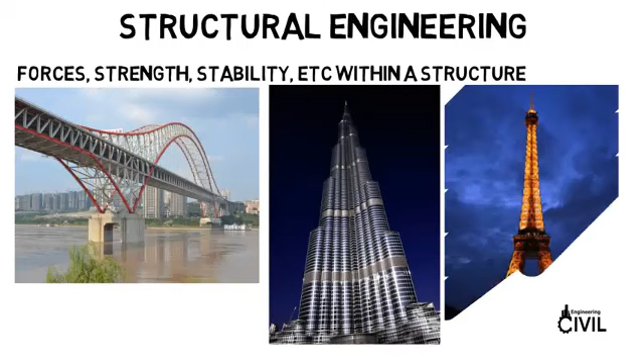First, structural engineering is about calculating and understanding the forces, strength, stability, and so on within a structure. It could be a bridge, a skyscraper, a landmark, or even a spacecraft or aircraft. Remember, these structures are very heavy and need to support their own weight so that they don't collapse.

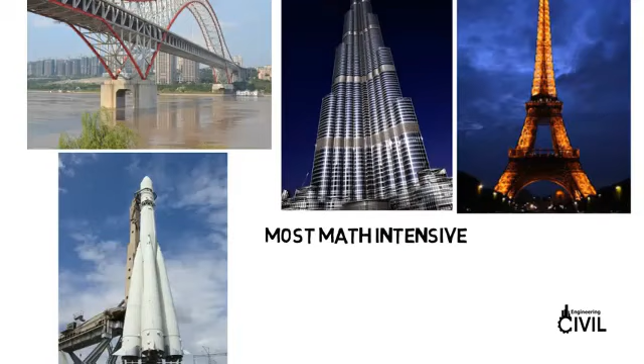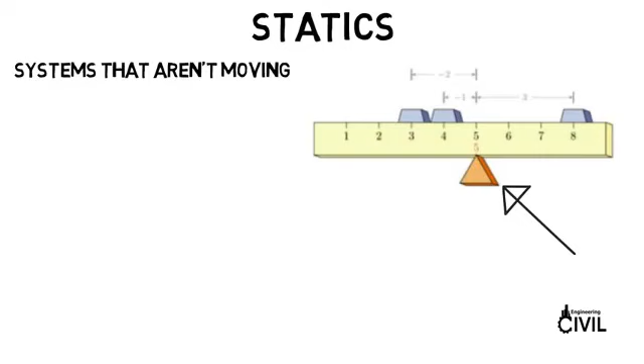This subfield is the most math intensive and has lots of physics. All civil engineers will take a class called statics, which is all about the forces and systems that are not moving. In basic physics, you may have done a statics problem, like where does this support have to be for the system to be totally balanced and therefore not moving. You summed all the forces which equaled 0 and all the torques which equaled 0. And that's the basics of statics.

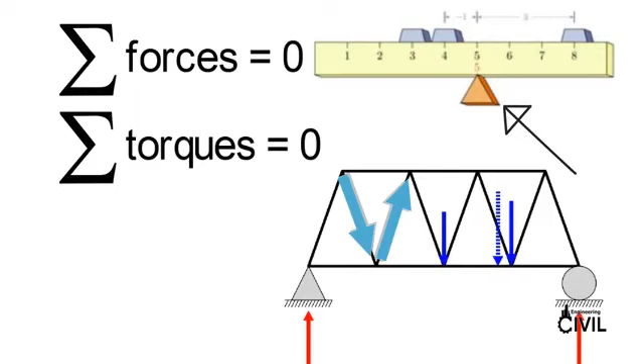So if you're looking at the forces within a bridge or truss, the same principles apply, but now there's more to it. The weight is straight down as shown in blue, all the beams exert forces on one another, but the sum of them is equal to 0, and the torque sums to 0 as well because the bridge is not moving. It's of course even more complicated than this, but if you enjoy that kind of basic physics, then you'll likely enjoy the statics and physics you see in structural engineering.

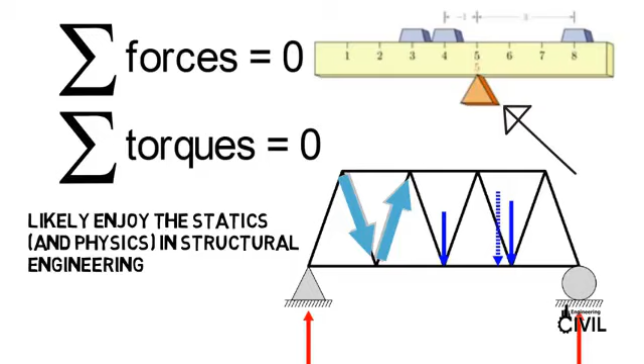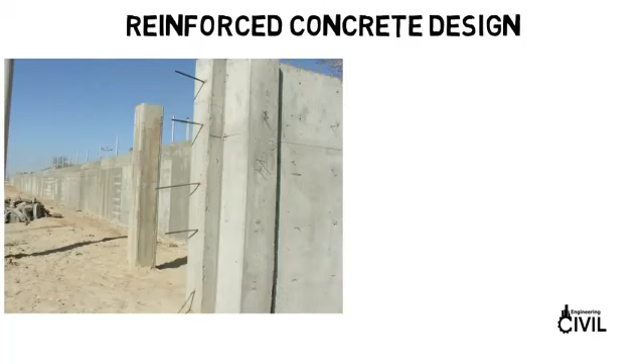So that's just a very simplified explanation, but now let's dive into some of the classes they would take. One class that would be important for structural students is a reinforced concrete class. In concrete structures, they reinforce it by putting steel beams in the concrete. We can't see those beams, but here, before construction is done, you can see them sticking out, or you can see a lot of them on these unfinished columns.

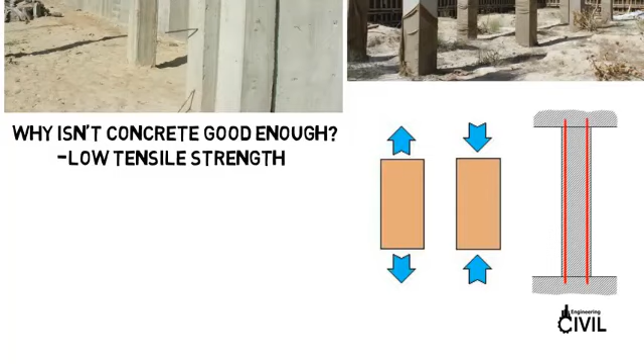So why do they do this? Why isn't concrete good enough? Well, concrete alone, once hardened, has low tensile strength, as in it does not handle being pulled very well. However, it's okay with being compressed. But to counteract that low tensile strength, they add steel beams and pour wet concrete, which hardens around them, and then those steel beams have high tensile strength to counteract those types of forces on the structure.

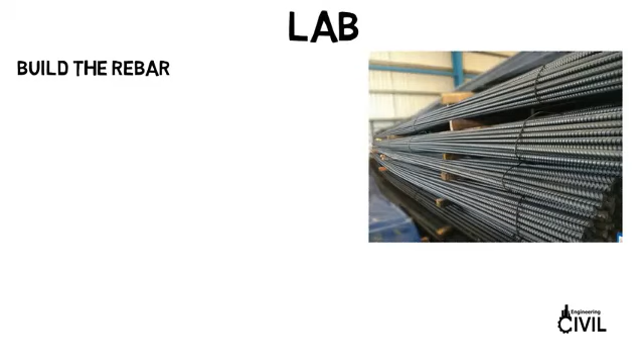So in a lab for this class, you might build the rebar, or the steel reinforcing rods, pour the wet concrete onto them, then once it dries, use a machine that holds the beam on both sides, then apply forces in the middle and keep increasing the force until the beam breaks or cracks and starts falling apart. That force being applied is sent to a computer that tells us the loading on the beam so we can collect the data and get the properties that we need.

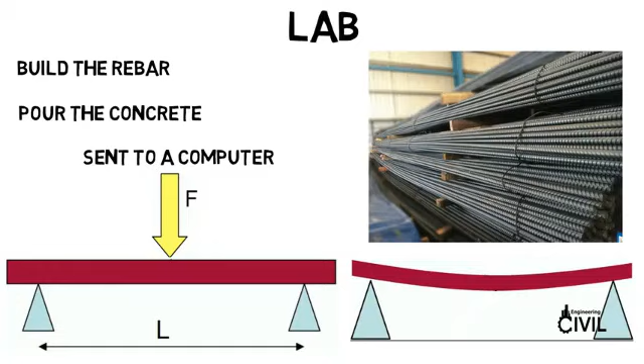You could take structural dynamics as an elective class. Dynamics is about moving systems, unlike statics. So this is one of the few classes where motion is included. Whether it's wind or an earthquake that shakes a building, you need to know how that motion will impact the structure itself and all the forces within it.

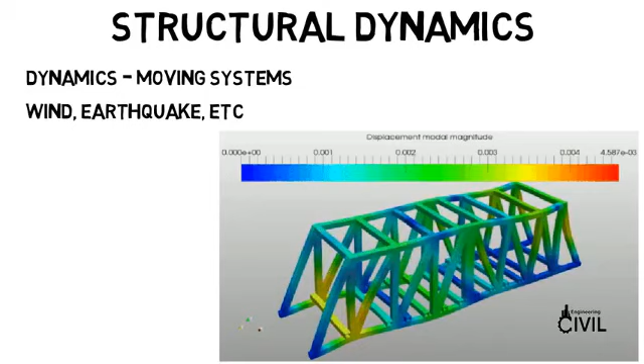I've shown this animation before, but mostly for mechanical engineers as it's a vibrating system that they could analyze, but civil engineers could get into this as well. They have to make sure their designs can stand up against any type of movement the structure may be subject to. You could take an elective class on seismic analysis, which is specifically about calculating the responses of a structure to an earthquake, or one on bridge engineering, which would be a class on highway bridges, materials used, distribution of loads, and how forces are spread throughout the structure, and so on.

Mechanics of materials, like how twisting and bending a beam or column causes it to become internally stressed. Timber structure design, which is about analyzing properties and forces within wooden structures, and much more. See how even if you choose structural engineering, you could still take many different classes from the other structure students? It's a very broad major, but hopefully you really get the idea by now.

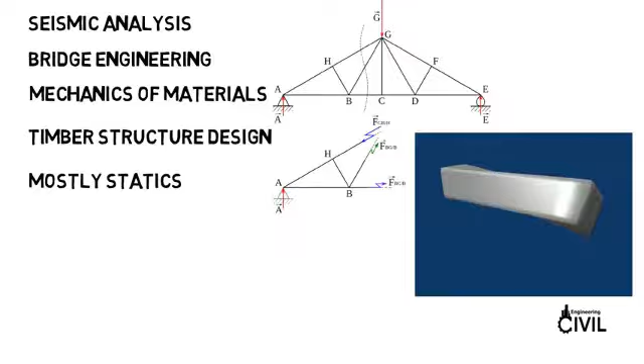Lots of physics in this discipline, but mostly statics or forces and structures without movement. In the real world, these engineers often work on the computer and use software for their designs, where that software does that advanced math to determine the forces throughout the structure, like you see here with a truss and its components. You may still have to do hand calculations, but most of the rigorous analysis you learned in school will be left to the software.

Now let's move on to geotechnical engineering, and you'll already see how different these disciplines are.

Geotechnical engineers are concerned with the behavior of earth materials like rock and soil, but the main focus is soil. This may seem odd, but you'll see how important this is.

The structural engineer can do everything right to make sure the building will stand up, but if the geotechnical engineer messes up and you put a structure on soil that can't withstand it or is uneven, the building could fall, sink into the ground, or even lean to one side, probably the most famous being the Leaning Tower of Pisa, which was a result of soil issues.

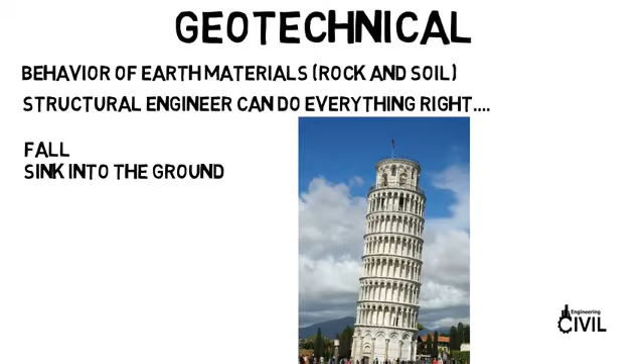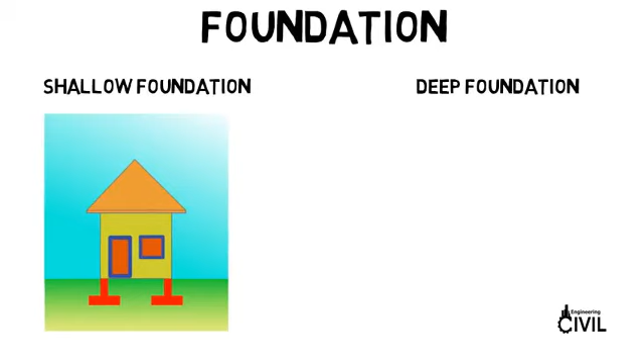Then they also have to consider the foundation of the structures that are being designed. Should they have a shallow foundation or a deep foundation? You may not realize it, but our houses and all the buildings you see have foundations that go underneath the earth to keep the structure as stable as possible by transferring the weight from the structure to the earth.

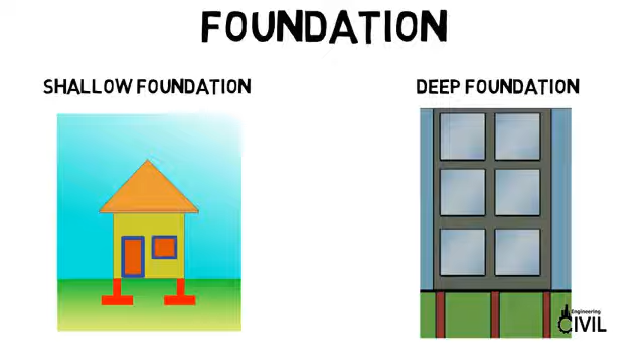But geotechnical engineers rely heavily on testing. So a lab you might see in college is to go out as a class and collect soil samples around your university and bring them to lab. You would have to classify it, like is it sand, gravel, clay, etc.

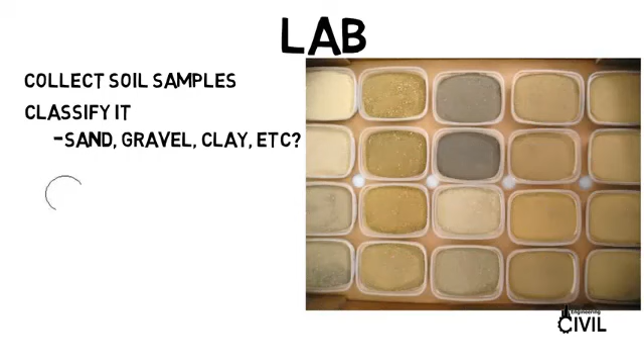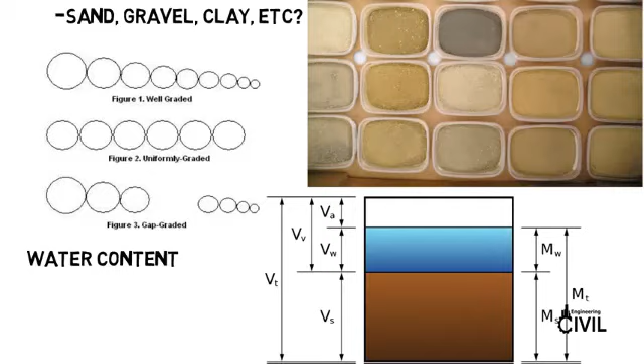There are many soil types and you may have to look at the grain size or how it reacts to water. You determine its water content by analyzing the sample, which will be comprised of solid soil, water, and air of different masses and volumes. But most importantly, you'll measure how the soil will react to mechanical loading or to different forces acting on it.

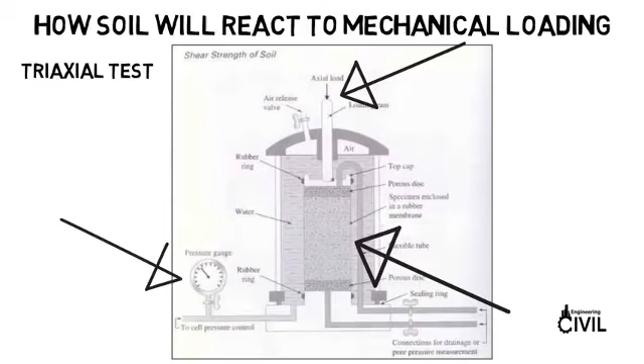So you might perform a triaxial test, for example. Too complicated to explain for this video, but essentially you put the soil in an enclosed area and apply a force or load to the top which pushes down on the soil. Then pressure sensors measure the pressure at different points to see how the soil is being affected.

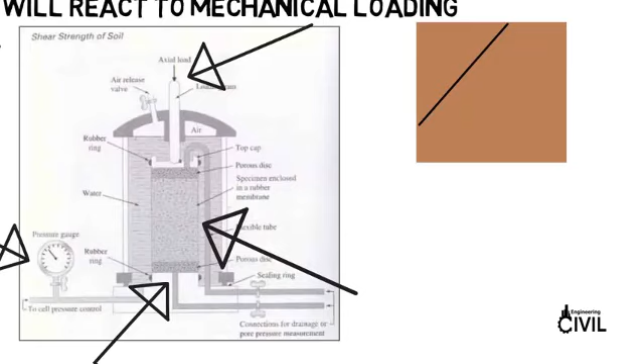If you imagine a square sample of soil and you add a force to the top, the soil can fail along some weak plane. Basically, the weight overpowers the friction holding the soil particles together, and the soil will start to slide, which is known as shear failure. Its ability to stand up to this is known as shear strength, which is one thing that the triaxial test on the left tests for.

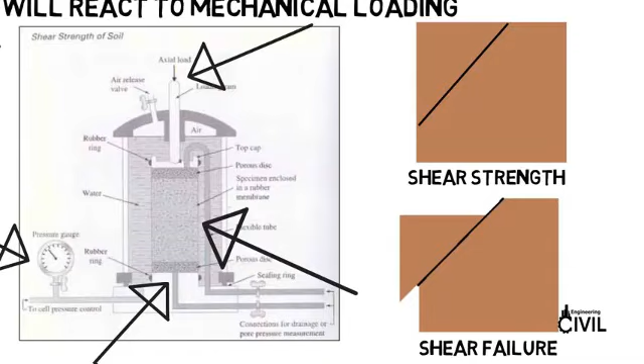And this leads us to what a career in geotechnical engineering could be like. You might be the person who goes out to the field where a structure is going to be built and collects soil samples all around the area for testing. Or you could do testing at the field.

One of the most used tests right now in this field is cone penetration testing, where a large truck goes out to the field which has all this equipment on it, and a cone is pushed into the soil, and the pressure will be monitored by a computer on the truck as it moves through the soil into the earth. Based on the pressure, you can analyze the soil mechanical properties.

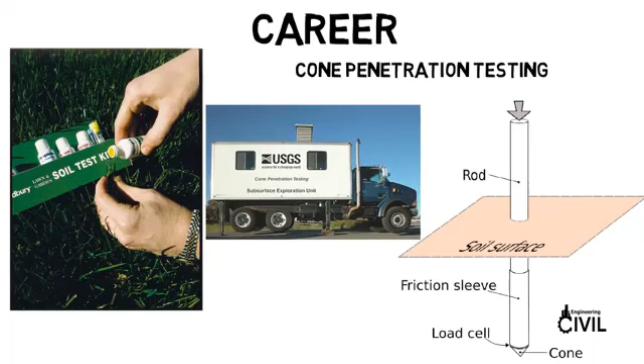Or maybe you could work in a lab where you would do the testing on the soil after it's been collected, like I showed with the triaxial test. Or maybe you could work on the computer and input the different types of soil from the various locations at the site so you can digitally lay out the area that the structure will rest on. So you could be in the field, in the lab, or on the computer.

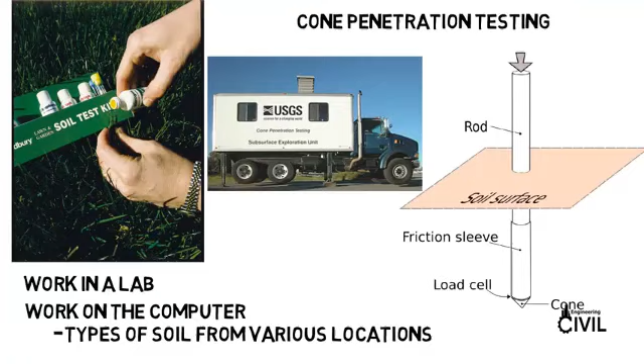Your elective classes could include geotechnical earthquake engineering, which would be like learning the dynamic behavior of soil as opposed to the structure itself. Then slope stability analysis and how to safely design structures on slopes. An example would be an embankment dam. Analysis of deep foundations, where the structure goes deep into the earth for a stronger support, like for skyscrapers. And of course, there are many more classes.

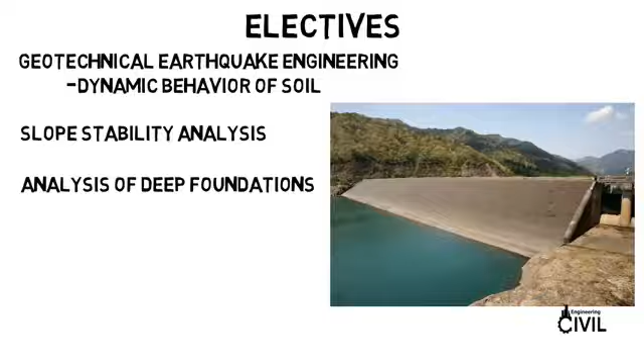Now let's move on to water resources engineering. This is about the design of systems to manage human water resources. They can work on a water treatment facility, designing dams, pipelines, channels, canals, and so on. Maybe you have to design a storm drain system in the event of a large storm. Where is all the water going to go and how will you get it to the ocean efficiently?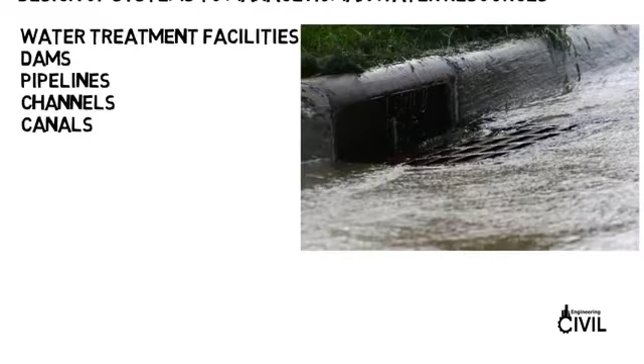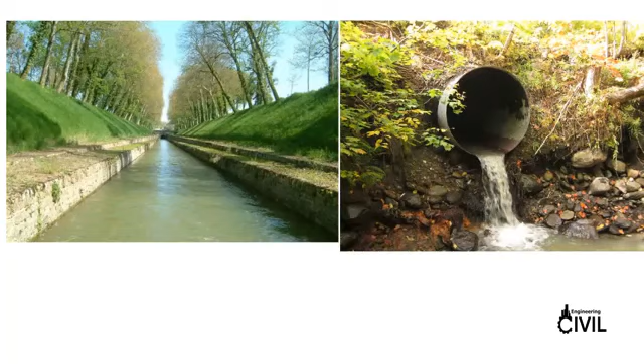Or you could design a canal, which is an artificial waterway to transport water for irrigation, or it can be used for ships and boats. Or you could design a culvert that will allow water to flow under a road or trail or some other obstruction. Elective classes you could take include coastal hydraulics, where you learn about ocean wave propagation, submerged pipelines, seawalls to protect human habitation, and so on.

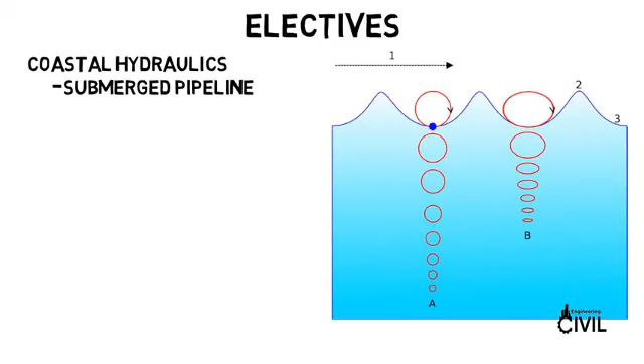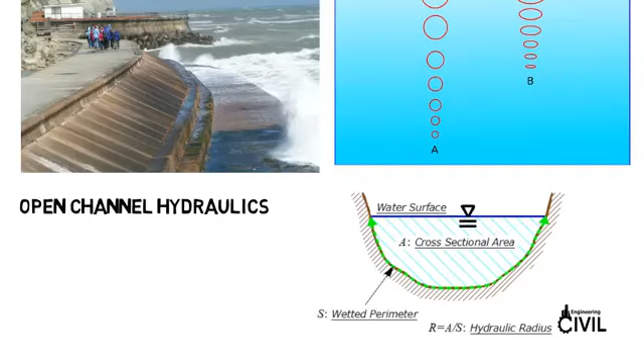Or open channel hydraulics, which is about fluid flow in an open channel as opposed to a closed channel or pipeline. Last is transportation engineering. This is about safe and efficient movement of goods and people. These are the engineers who design streets, roads, highways, railroads, public transportation systems, and even airports.

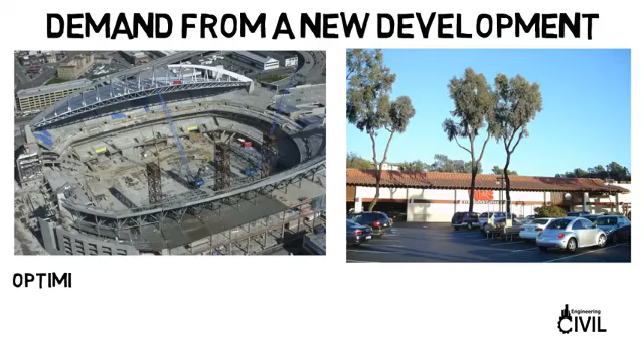This engineer might look at the demand from a new development, whether it's a new stadium in your city or a new grocery store in a new location. This causes new types of traffic throughout the area. The engineers try to optimize how the new development impacts existing traffic. They look at data from similar places to see what kind of traffic they get, then make improvements where possible—it could be as simple as adding a bus stop nearby, or as involved as expanding the roadway to allow for more traffic.

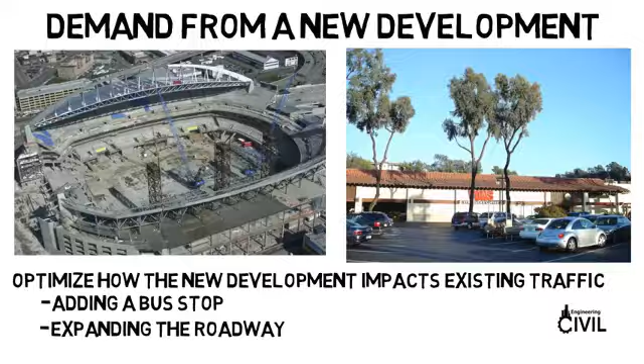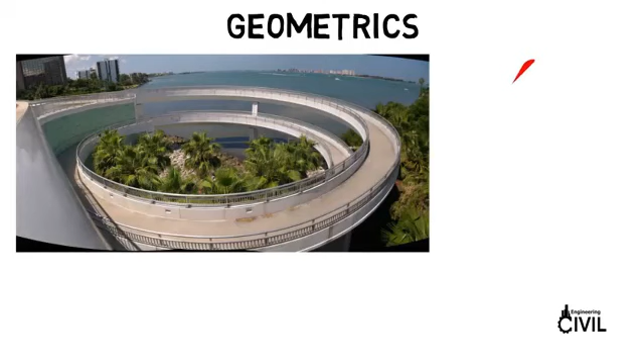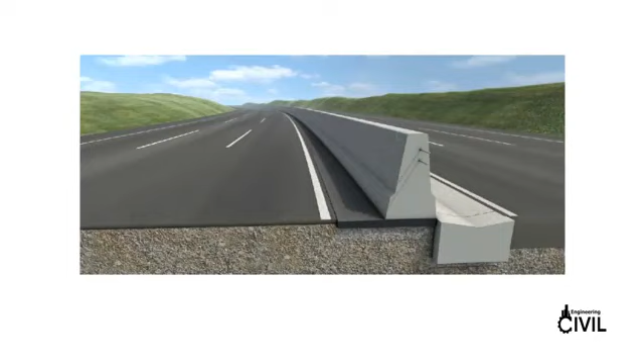They could work on the geometrics of the roadway, such as what radius of curvature an off-ramp needs for a car going 55 miles per hour so the tires won't slip. Or if they're going up an incline, the driver needs to see far enough ahead to stop if there's a sudden obstacle. Or what the cross sections of a freeway need to be for the lanes and shoulders to accommodate expected traffic.

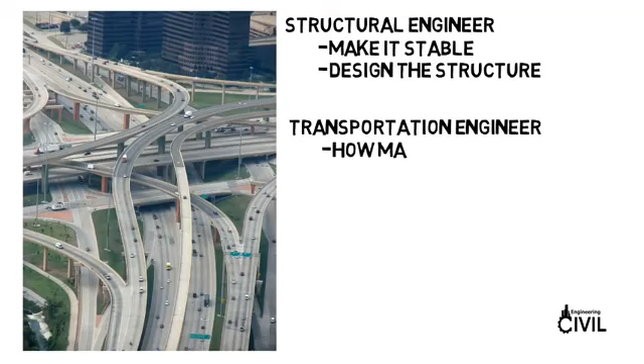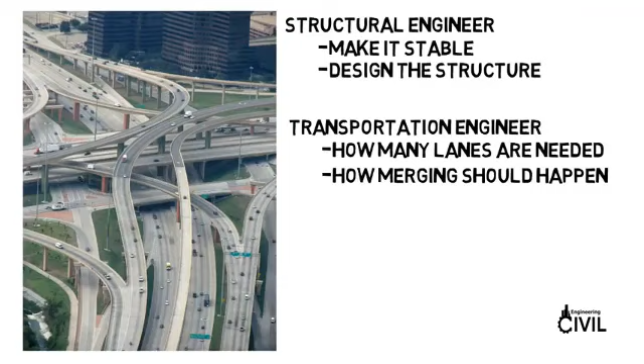Let's say a highway interchange is being designed. A structural engineer would make it stable and design the structure itself, but the transportation engineer would determine how many lanes are needed based on traffic, or how the merging should happen to maximize safety. They make sure the layout is designed to maximize traffic flow and safety rather than the physics of the structure itself.

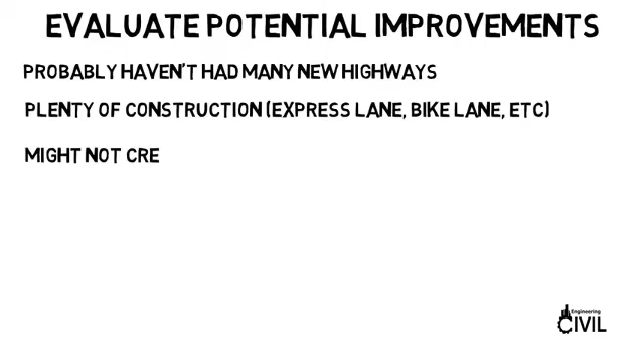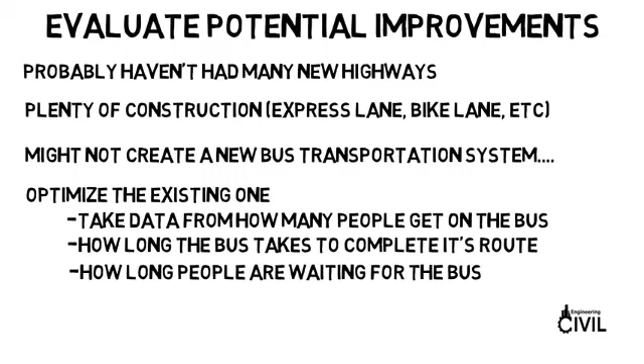Often these engineers evaluate potential improvements to cities in terms of transportation rather than create a totally new design. You probably haven't had many new highways put into your city in the last few years, but there's probably been plenty of construction, like adding an express lane or a bike lane. So they might not create a new bus transportation system, but they may optimize the existing one—taking data on how many people get on the bus, how long the route takes, how long people wait, and so on, to optimize the route, the stops, and more.

Your career will also likely involve a good amount of computer work. You might have to create a layout of a new lane, off-ramp, bridge, or whatever you're designing on AutoCAD, which is a very important software for civil engineers. Or you could use software to analyze and simulate traffic.

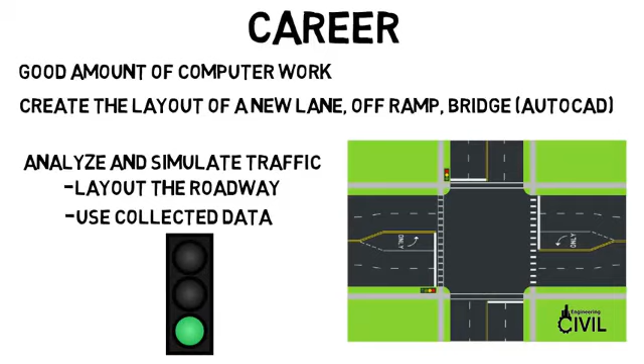You could lay out the roadway of a city and use collected data of traffic during different times of the day to simulate new additions. You could add a stoplight somewhere and see what the new traffic would be like. Or you could make a minor change, like making a certain stoplight stay green a few seconds longer, and see how it affects traffic on those streets.

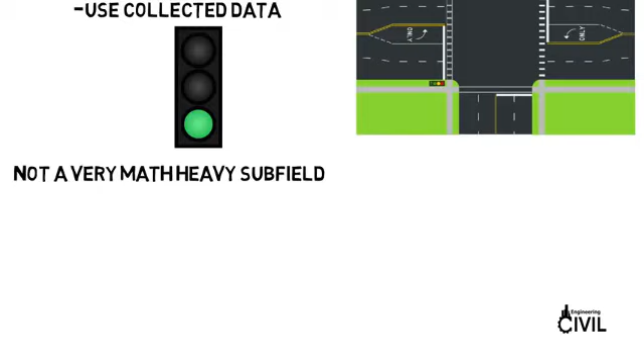Just note, this is not a very math-heavy subfield. In fact, it's probably the least math-intensive of the four subdisciplines I've talked about. It's more about taking data and analyzing it. Even with the radius of curvature and how fast someone should be going, you won't use the coefficient of friction and do circular motion physics or anything like that—you use even simpler equations to get what you need.

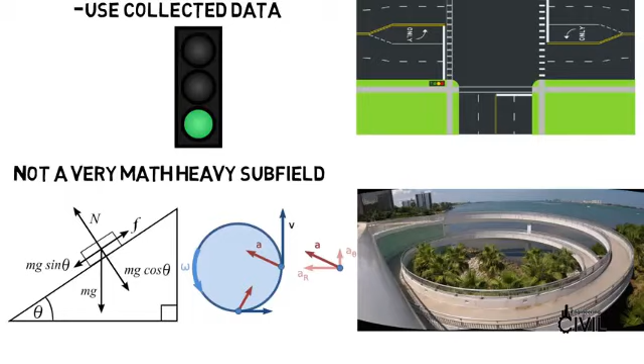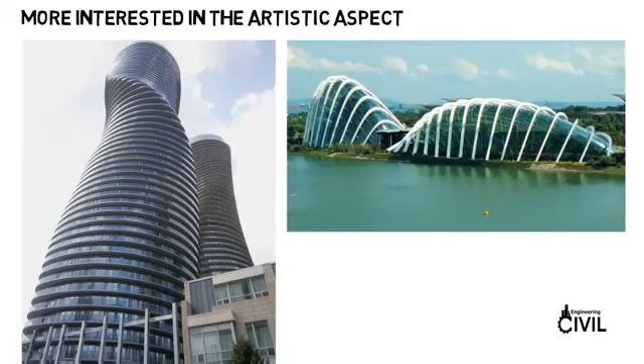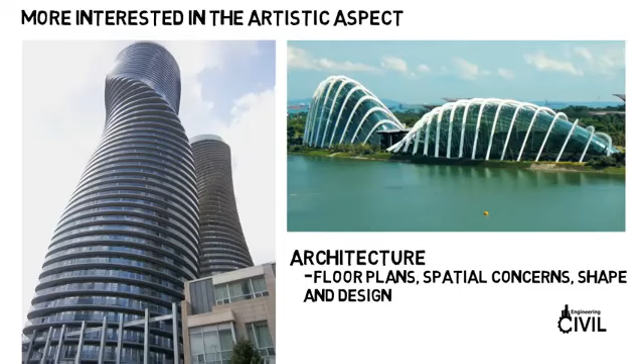Now that's all the main subdisciplines of this major, but there are some final thoughts I want to include. If you're more interested in the artistic aspect of building and structure designs, architecture will be better for you. Architects deal more with floor plans, spatial concerns, and the shape and design of buildings. They have to understand structures and physics, but not quite as much as a structural engineer. They hand off their design to the structural engineer, who makes sure the entire structure can support itself and deals with more of the technical work.

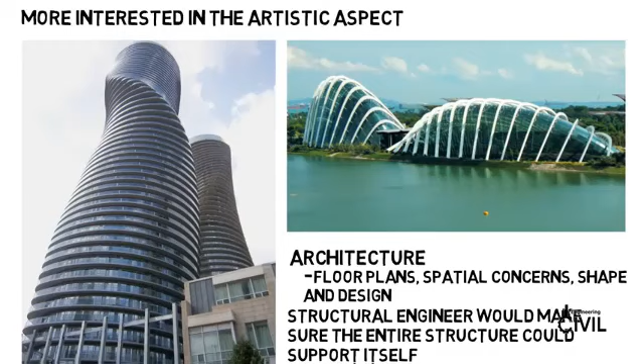If you want to be the one who puts on the hard hat and does hands-on work with machines, physically building structures, construction will be better for you. But there's also construction management, which you can still get into as a civil engineer. Construction companies hire civil engineers for their technical background. Construction is the hands-on part, but construction management is more about guiding the construction, putting together schedules, budgeting, and figuring out how all the pieces come together.